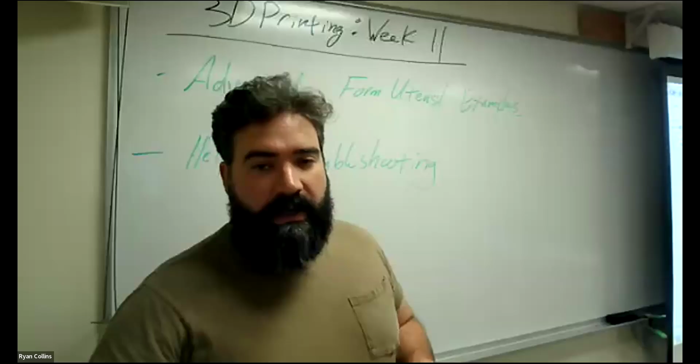All right, so like I said, we did our basic form utensils, make it a spoon, and ours kind of turned slightly nightmarish the last time, but that's all right. So tonight we're going to do some more example modeling of utensils, kitchen utensils. Again, this assignment really is super loose for what you're trying to make.

Whatever you want to assume is a kitchen utensil, spoon, spork, battle axe, sword, master sword. I don't know, whatever. I don't know, Halo sword. Cool. There you go. That's what you use for chopping onions. Yeah, full covenant snacks. Anyway, whatever you want to do, more power to you.

Basically, we are just making some sort of semblance of a utensil using the form workspace. Now, again, you are not required to make it only in the form workspace, but the form workspace is where you will be making the bulk of your utensils, with outside of the form workspace as details, like last time we used a sketch and extrude to cut holes in a spoon to make a strainer, that sort of thing.

I'm not saying, oh, I want to make like a kitchen knife, don't do just a basic sketch and extrude. I'm going to show you how to do that in the form workspace because that's what you need to be doing that in. That's the whole point of learning to work with the form workspace tools. So let's hop over and I'll show you what I'm talking about.

So we made our example spoons last class. Actually, the ones we made last class were far more unsettling, but that's all right. Just shifting over to auto color mode, just so you can see the difference. Again, your objects do need to be on their own components. So with this one tonight, some prior examples I made, albeit a somewhat scimitar-like kitchen knife, but yeah, sure, whatever. And I also made an example of just a kind of basic spatula.

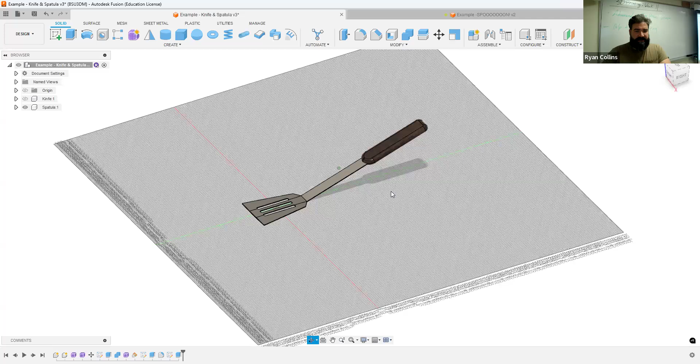Now this seems like, okay, I could have just made it as a sketch extrude, kind of sort of, but not because of how it's made. So I actually did this in the form workspace, and I'm going to show you how to do some basic stuff like this. So, as always, let's start a new project and save. Definitely save. Example in class, more utensils. All right.

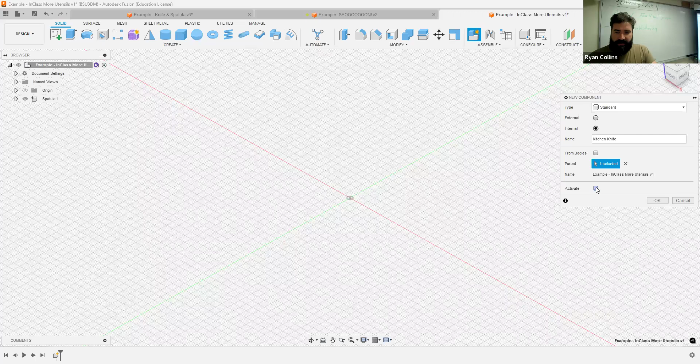So, a good thing to do is if you are going to be making some very different ones, go ahead and make your different components now. So, I'll go ahead and say one will be a spatula, and I shouldn't have left it on activate. And the other one, some sort of kitchen knife, and uncheck the activate box just so it doesn't already activate. All right, cool. So we got those all set.

Whichever one you want to start with, doesn't matter. So let's start with the spatula. It's a little more simple, kind of, sort of, go from there. So starting with the spatula, again, we are not starting with sketch and extrude. We are starting with the form environment. The little pink starburst guy here, the form workspace, brings out the other tools.

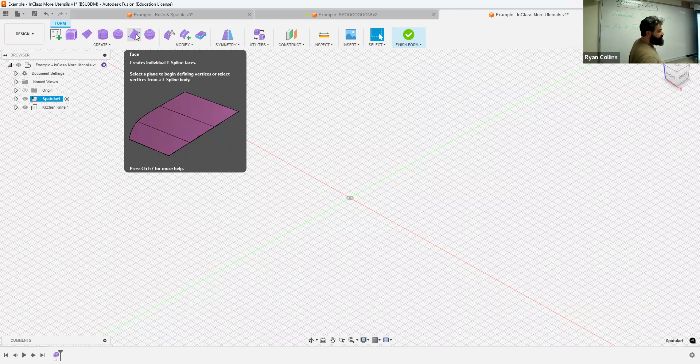Now we're going to work with this essentially the same way we did before with the spoon, just with a couple of different approaches. Now, what we did before is started with a plane. You could do that, certainly. You can also, if you want to play with free form stuff, work with a face, where the face is just the individual squares. We talked about before, any of this stuff is going to be chopped up into sections.

So a plane or a cube or anything like that, you're going to have your edges, which are the actual lines. You're going to have your vertices, which is anywhere there is an intersection. And then the face is the whole thing, anything between the lines and vertices.

Doesn't matter if you subdivide any of that kind of stuff or it's broken up anymore. Doesn't even have to be even. You can subdivide it in different ways. You can even go full on and chop everything into smaller and smaller bits. You're still going to have those whole things as faces, intersections as vertices.

You get the idea. Now, with any of this stuff, you can play with it, but remember the best way to start simple and add complexity later.

If you want, you can play with starting with a face. Standard procedure, you start by selecting a plane, and from there you're building little boxes. With this, it's a little bit more difficult to work because you're really more free form making this stuff. So I don't recommend working this way to start because it's easy to get lost. I'd start with prefabricated or pre-made forms.

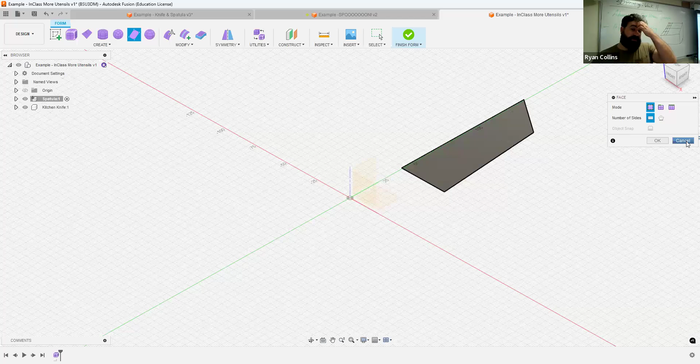Let's get rid of that. Start instead with a plane. So this is more like sketching. To begin, I'm going to start my plane toolbox has it selected as a center point rectangle rather than a 2-point. That'll help me keep things symmetrical. You don't have to start on the center point, but I do recommend working on a major axis.

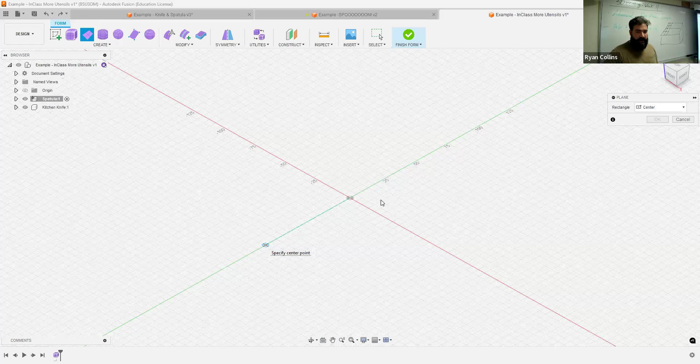So let's start by just creating what will end up being, probably, we'll make the spatula and then the other parts. Remember, don't hit enter. Use your left click, just start the selection. I want to hit it there because then you get to make your subdivisions here. You also get to apply symmetry.

So with this, I want to add symmetry, mirror. Let's go lengthwise. That's going to go right across the y-axis. You can see it's highlighted green. Great, that's what I want. Faces you can add and subtract, add more, add less. I would leave this, at least this one, left and right, simple symmetry, 2 faces. There we go. You can add more later if you want. Depends, totally up to you.

Now with this one, depends on where you want to go with this. I would recommend if you just kind of went freeform, play around. But it is a good idea to start with a reference image just so you don't go completely off the rails. But honestly, it's your project. Do whatever you want to do.

With this one, unlike before, I am going to add a little bit of symmetry to this. The problem is, see how that changed things. Because I now have symmetry, I'm trying to apply symmetry across 3 faces. So in this case, I probably need to go ahead and add more to 4, so I have left and right. I'll show you why I'm doing this in a moment. Hit OK. There we go. I have my symmetry applied. It's not centered, that's all right.

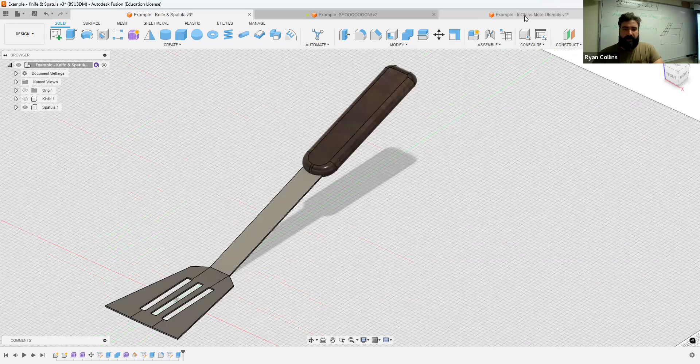Because what I want to do now, I'm going to go to the top view, and I'm going to make this into the blade, and then I'm going to create the handle. So what I've done here, just made a flat section here. I probably could have gone with even fewer parts. Wouldn't have been a bad idea.

I'm going to use my edit form. I'm going to select edges, and I'm just going to grab those 2 edges. And instead of dragging straight up, because that's going to morph everything, what I'm going to do is extrude those. By pressing and holding Alt, you can see I can start to stretch stuff. It's a pretty handy tool, and I'm using just the directional arrow. I'm not using the pan because otherwise that's going to do some weird stuff.

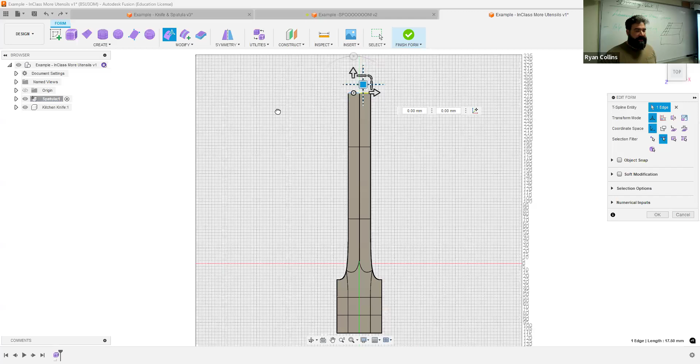Don't want that. Now, one quick thing. Do you see what happened though? This is split. How the heck did this happen? That's one of the issues with extruding just by faces and such.

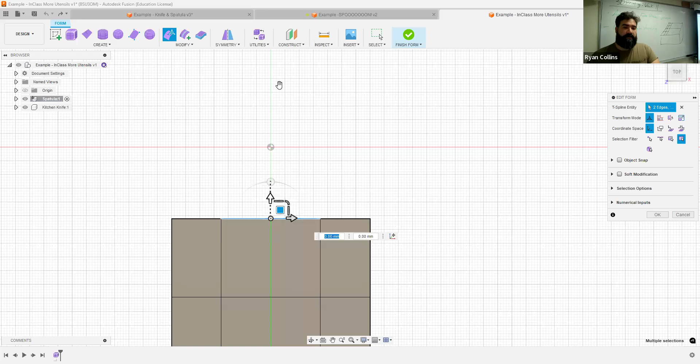You have to make sure that you also grab the center point. So what I mean by that is, let me Control Z, shrink that back down from before, and I'm going to change my selection filter to all. I have to make sure that I grab edges and that point. So it's going to show here, I've selected 2 edges and a point, because now when I press and hold Alt, that is not splitting around on me. So good, that's what I need.

All right, so I'm going to just go ahead and, again, stretch it. Each time you stop, release Alt, press it again to continue if you want to extrude. Otherwise, like from there, if I release both hands and then click again, I'm only moving the edge, I'm not adding an extra edge. Doesn't really matter in this case, it's totally up to you. But I am going to need that bend to change a little bit, so we'll figure it out in a minute. All right, up and up and up. Sure, that looks somewhat handy. Totally up to you.

From here, what I want to do is angle those edges to make it more like a spatula, how they're usually shaped. Obviously this is yours, so make it however you want. But if I want to make those edges a little different, I'm going to select all 3 sides there.

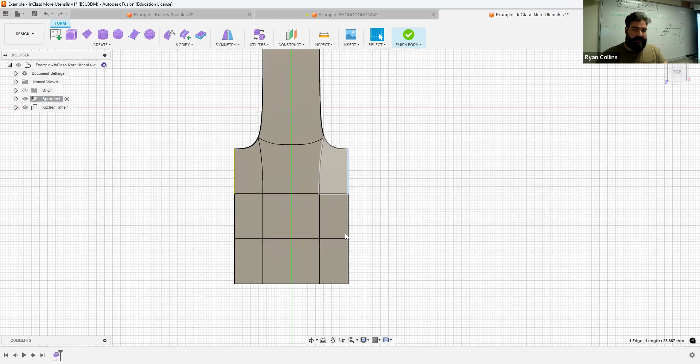I double-clicked on one edge to select it, and it's just the one that's blue. Double-click on just the edge and it selects all the things. But I accidentally got out of edit form, so let me go back to that and double-click.

Now I'm going to use the rotate tool because it's mirrored - see how they rotate in and out like that. Really simple, pretty handy. You can obviously make this into a pizza peel or whatever.

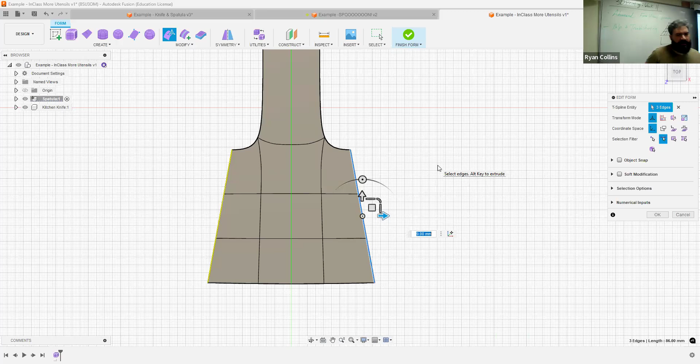So I have the initial object that I created, but it's grayed out, so when I hit edit I can't select it. You can kind of see it there. I don't know, give me a minute, let me check with that. Not sure what's happening with that one, but all right.

So right there, we've got a kind of sort of spatula form. Great, but it's flat - how do I actually bend this?

We're going to do exactly that. Same deal, edit form. I'm going to turn to the right side and I need to select the whole thing, so let's select all, and use a selection box from the right so it selects all the things.

Now the problem is if I try to rotate this, it's going to do some weird stuff, but that's all right, we'll fix it in a minute. So if I do that, I can bring it back up to straight, but it's all going to keep this curve.

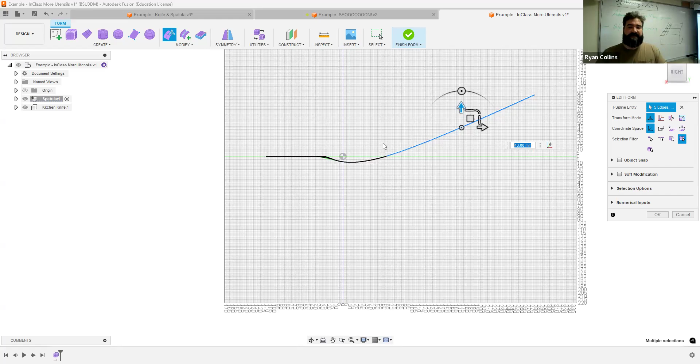This is all T-spline curvature - basically planar geometry created with fit point splines, what we used with our first bits of drawing. It curves based on lines and such, so this is going to mess us up if we don't change where some of the lines are.

So what I'm going to do, Control Z - what I want first is to move where this edge is. I just double click that edge and want this to be closer down here. Now I could try to just move this, but that's doing some weird stuff.

So the other option is I can select by faces and use the scale tool. Let's try to shrink that and then move it. Big thing is you could easily get into trouble with this stuff if you don't make use of some of the other scale tools, or you get really lost. It's really easy to do.

Another thing I can do is try to straighten this edge here because it curved like it did. Let's see what we have in our toolbox. Oh, I didn't want to cancel that - I wanted to. That's all right.

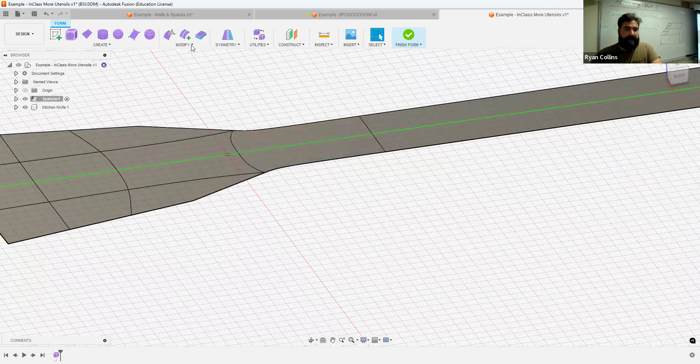One of the things we can do, let's try Crease. I'm going to select Crease, and what that does is take a curved thing and make it a folded edge. We talked about pieces of paper before - we've got a bend versus an actual sharp crease. Let's see what that one does.

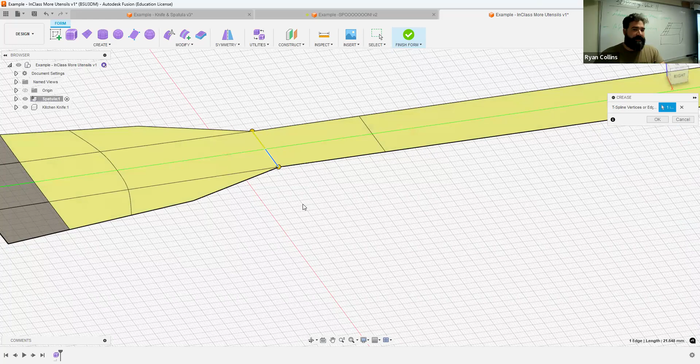I'm going to select that line, and it straightened it - that's exactly what I want to have happen, I want that to straighten. Great. Okay, so again I can try to edit this a little bit, but you know what, I'm not opposed to that spatula look. That works for me, all right, cool.

So now let's go back and bend this up a little bit. Select selection filter and edit form, all the things. Select from the right all the way up because I want this to bend right there. All right, that boots me out of that every time.

So I'm going to use rotate - however it's going to do all kinds of funky stuff. But what I can do from there, let me just bring this up until it's flat again. That line's flat, and so it can probably go up just a teeny tiny bit more.

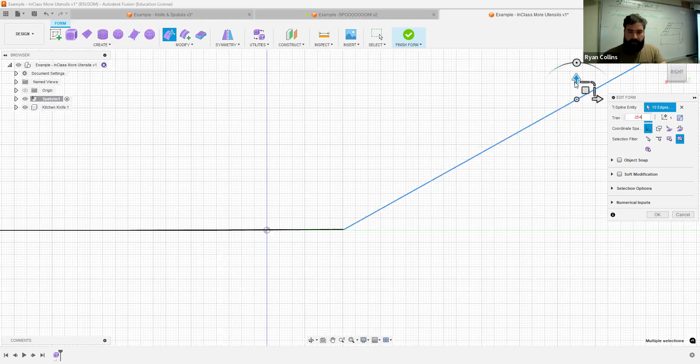Probably one is going to be too much, so in between, probably have to use like a 0.5. Maybe 0.25? Oops, and that looks pretty flat. With this project, close enough is definitely going to be close enough.

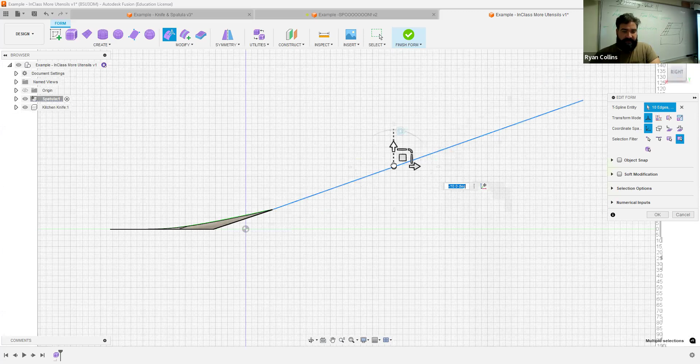All right, we'll go with that, works for me. That's probably a pretty extreme handle angle for a spatula - probably go a little bit less extreme, but you see where we're going with this. If you want to try and shallow it up, same deal. All right, there we go, that was a little bit better. All right, cool, that works for me. Hit OK.

All right, that's pretty much a really basic spatula part. But right now it is just that surface thickness, only currently the thickness of a sheet of paper that's been folded. I need to literally add dimension, add thickness to that.

So I'm going to use the thickness tool, thicken. It's right there, one of the other keys, under modify. Select thicken, select the face, and add, I don't know, 1 millimeter thickness. Now remember you have a couple of options here. We'll say 1 or 2 for now, and you can see what's going to happen.

You have a couple of options with your toolbox: thicken type, sharp, soft, and no edge. If I did sharp, obviously it's going to make it like a straight extrude, like that. Repeat thicken. If I do soft, it's going to make it squishy and round. Not quite what I want for this tool.

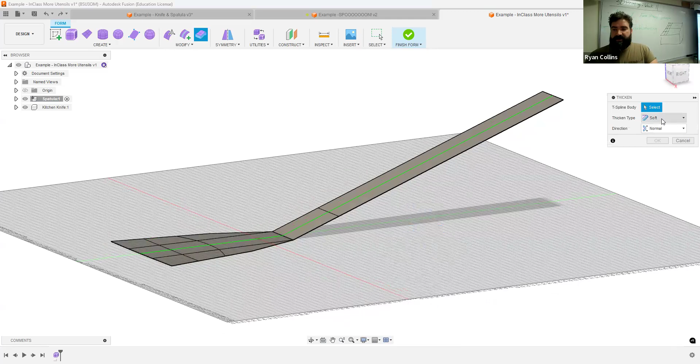The other option is no edge. Now this is if you basically want to offset, so that's exactly what I've done with this. This is using the offset tool. I don't want to use this right now, but I just wanted to show you what that tool can do.

Let me go back. The thicken I do want to use is sharp. That, I don't know, let's say 2 millimeters. That's probably a bit thick, but whatever. Hit okay. All right, it's a nice sharp edge. I've got my kind of sort of spatula look, and it's all bent at a decent enough angle.

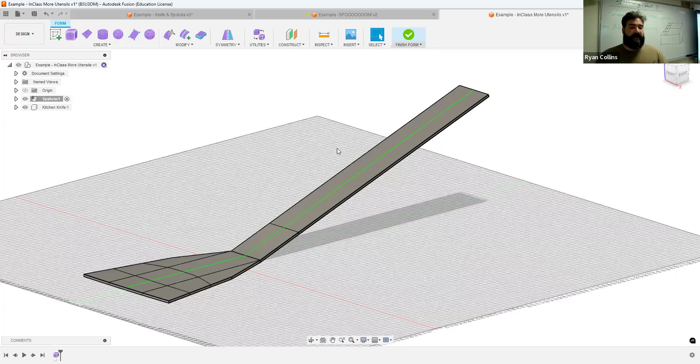All right, cool, let's save. Well, actually, hang on—when you're finished with this, this is all I need for this tool. But really simple, it's all sharp edge, nice sharp bend. I use the crease tool to make a sharper bend. Great, finish form. All right, goes back. It is a solid body because it's enclosed, all that. Let's save.

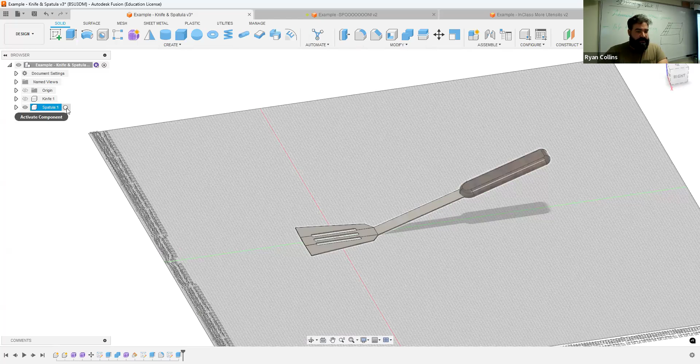All right, now I want to make a second tool, and with this you can do this either as one object, or I can go back in and actually create a second one either way. What I mean by that is I exited the form workspace. I could start an entirely new one because I want to make the handle here, or I could go back and right click, edit form. In this case, just for the sake of a little convenience, I'm going to create form.

There we go. Now selection of box is going to be a little problematic because I don't have any options here. Now the thing is, though, I want to use like, let's say, a box or something like that to create the handle. Well, the problem is that handle is modeled at an angle.

Now technically I could do a couple of different things. Like I could always just make it separate and try to get it to even out. But just like we did with the Jewel project, you can create construction planes based off of things. So let's go to construction plane, and let's see here, which is...

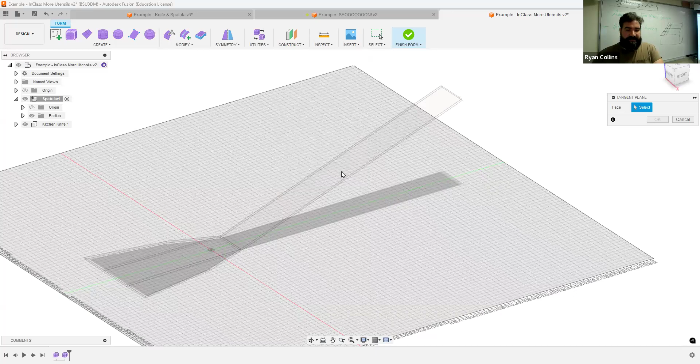Plane along path—sorry, I had a brain fart, I forgot which one it was. There's so many options here. Let's do tangent plane. Now the problem is, because of the way these things work, sometimes it won't let you select stuff. It does some weird things because form doesn't read—even though it's a solid object, it doesn't read the same as a solid body if I had created this through our standard sketch and extrude stuff.

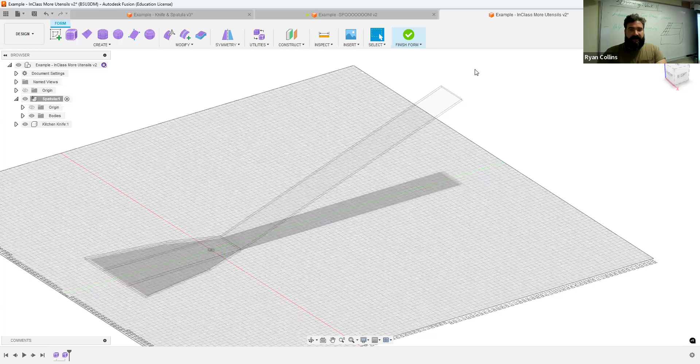So it doesn't let me select a lot of stuff. So what I'm going to do is cancel, finish form, and you can either just delete that one, or I'm just going to move the time slider between there, because what I want to do is try constructing a plane.

Offset plane—no, not offset plane, sorry. I want to put... dang it, I keep hitting the wrong button. Tangent plane—no, I don't want a tangent because that's not a circle. Let's do plane at... probably just plane at angle.

Yeah, so what you can do is, since this does read straight, I can select one of these edges. Now the problem is it's wanting me to create an angle that way, but let's rotate it 90 degrees. There—so now my construction plane is actually at the same angle as the handle. So that was plane at angle. That one worked pretty well. Hit OK. All right.

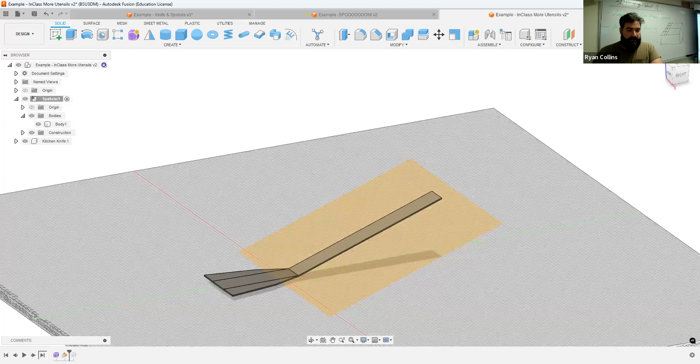So let's just say I had deleted that edit form, create form, and I want to use now that plane that I just created as the reference, not my standard X, Y, X, Z, all that stuff. I can use my actual plane that I just created. There we go. All right. So it's going to make this right there. So you got some options, standard thing again. We could try, let's just use the same plane there.

All right. So I'm going to use Z-axis, smack in the middle, and let's just make this a little bit bigger. There we go. Hit OK. It's just a plane. That's all. Length symmetry. Nope. I want width symmetry so that it is actually, where is my, oh, no. There we go. So same deal. I got symmetry side to side. Away we go. Okay, cool.

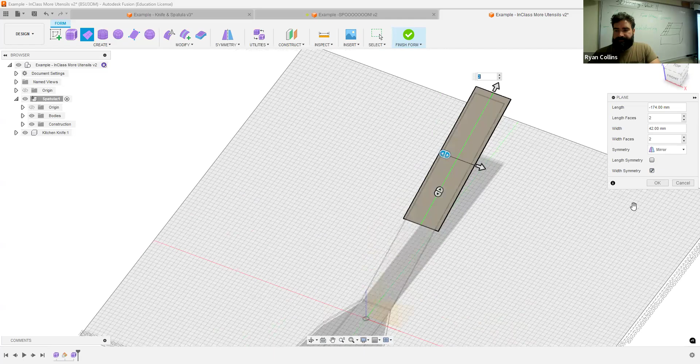So same deal. You can play around with this. You can stretch this around as you want. We can make curves on this. We can do our edit form, all of that. Let's see. I don't know. Let's move that out a little bit. We can make this kind of like just a weird handle.

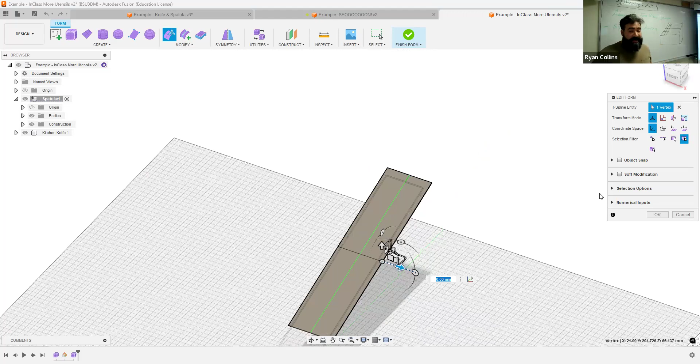But if you wanted to add complexity to this, I said, okay, let's try adding some edges. So I'm gonna select that, and I'm gonna do double. Oops, not simple. I want both, so it goes on both sides. Adding edges simply subdivides the surface a little bit, like so. Okay, that just added a little bit of complexity.

The reason I would want to do this is because now I could select like by vertex, and I could move these in and out a little more directly. So it just adds, if there's more points, now I can add more variation. That's all. So let's just say I just made like an extra wide handle. There we go. Cool. All right. Same deal. I want to thicken this.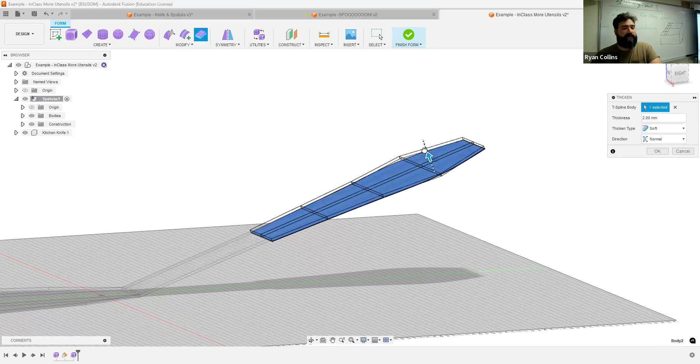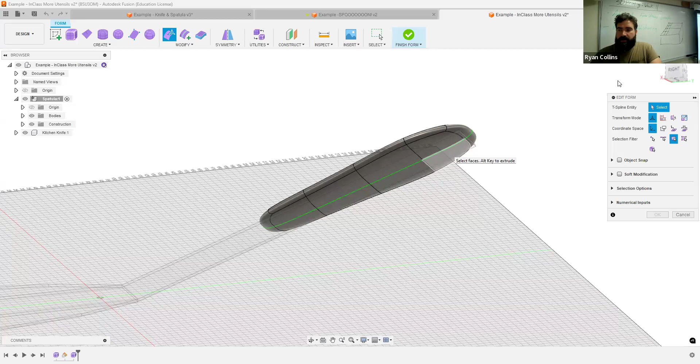Same. This time I'm going to use, we'll use soft. And if the handle was 2 millimeters, I don't know, let's say 10. Cool. There we go. Now, the problem is it's floating above my form, but easy fix there. Back to edit form. Select my face, and let's just select all the faces. So all I'm going to do is just drag that down, make it a little bit thicker. There we go. Hit OK.

Cool. All right. So remember, you can play around with this however you like, but now finish form, and we have kind of a blobby handle. Last thing on this would be adding details. So what I did for the details in this, cutting holes for the spatula, and what I didn't do on this one, but I did do on the knife, let's add some little pins to it. So that would be where the handle actually attaches. All right. I save handle. Oops, apparently I had that on.

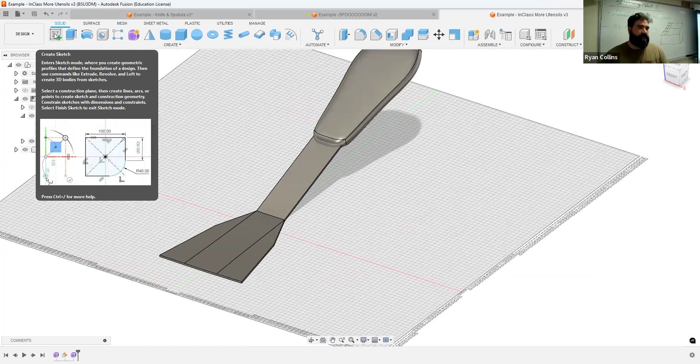All right. Easy thing, sketch and extrude for the base. We're outside of the form workspace. We're back to our regular stuff. Sketch and extrude. There we go. If you need, use a project tool to copy the outside edge. Press P, and we'll select my body. There you go. Just because sometimes it's a little bit easier to deal with just an outline than actually having the body there. I'm going to use a center point rectangle right on the axis.

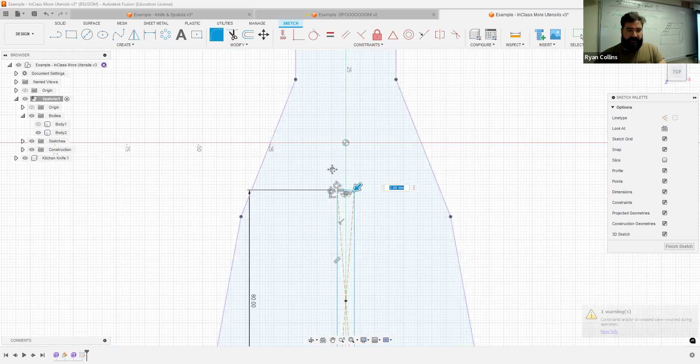I don't know. Make that, sure, 6 sounds reasonable. I don't know, 80? Sure. And let's put a little curvature into that. Fillet would be sidey side. Select all the things. Yeah, error. I know I'm changing things up. That's okay. Select, select, select, select. All right, great. Yeah, that's kind of sort of roundy. Works for me. Okay. Yes, I know. Change the constraints. It's okay.

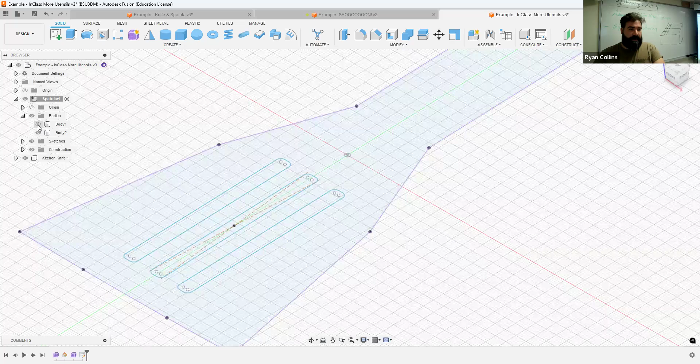And instead of making copies of that, just use the rectangular pattern tool. Double click the rectangle there. I want this to go in symmetrical directions, and let's have some extras. Yep, there we go. Made that. Finish sketch. Great. Unhide the spatula handle or blade. Label your objects. It makes things so much easier. And I'm just going to use Extrude to cut through this. So select my sketches.

And actually, since it's on the bottom plane, on the base plane, if I select to object, I can just select the top there and it should chop through. And if it's not, just use the slider to drag your object all the way through. The red goes to cut. Hit OK. There we go.

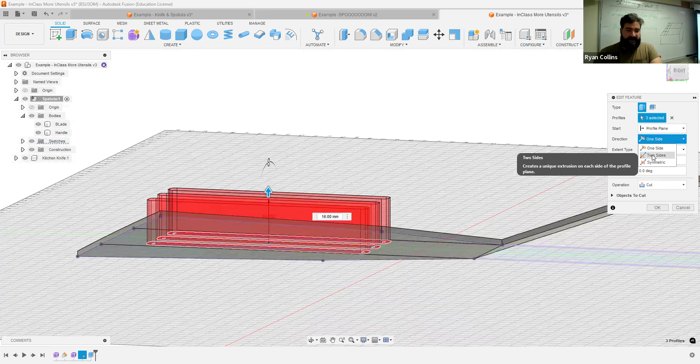Now see what happened? It wasn't all the way down. Should have made it go both directions. Go back, edit feature. Not a problem. With your direction option, go 2 sides or symmetric. It doesn't really matter. We'll just do symmetric. Way bigger than it needs to be, but that's all right because it does in fact go all the way through.

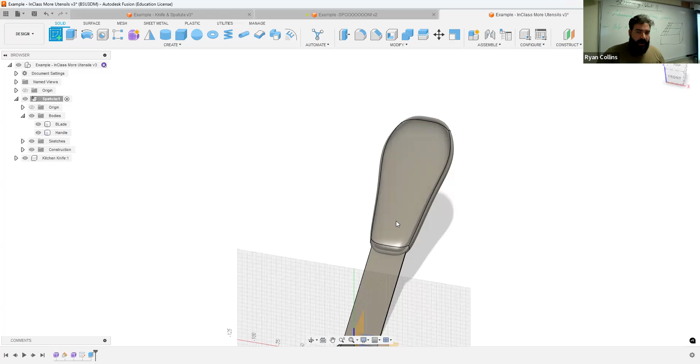No big. That's it for that one. Now for the handle, of course, we can add little details. Remember that you can sketch on surfaces, but you cannot sketch on forms. Even though we've converted it back to a solid, see, it doesn't like to select there. That's why we use the construction plane. So it hid that construction plane, just bring that back up. No problem. That's exactly the same thing.

Cool. There we go. So what I'm going to do is I'm just going to make a couple of circles that'll end up as cylinders, right on the axis. Make a pretend. Sure. Another one. There. Great. That's it. Finished sketch. Now I just extrude those two. No, I want both of them. Not letting me grab it. There we go.

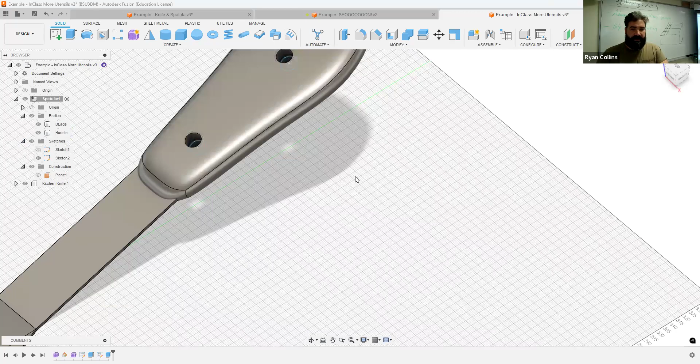So from there, if I extrude it symmetric both ways, that's going to cut through. Cool. I made my little chop, but I also want those to be solid objects. So one last extrude, circle, circle. And let's just extrude this symmetric. Let's see if it all works. Yeah, see, it's done. Like I said, form objects work differently. Fusion doesn't like to read them like we've done with basic sketch extrudes. It kind of messes with it. So you have to do a lot of this stuff manually.

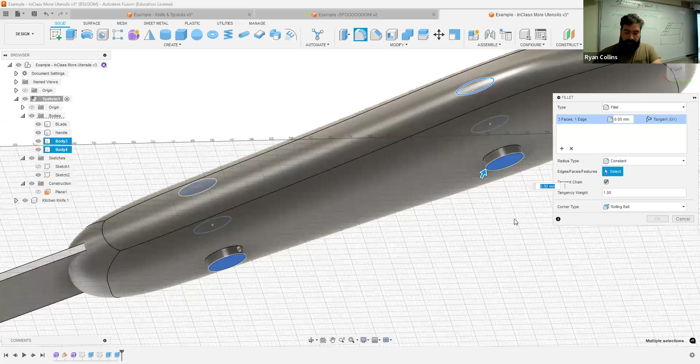So I'm just extruding this so it just sticks out a little bit. That's probably a little bit too much, but you get the idea. Yeah, that's fine. Nope, I don't want to join. I'm just going to leave this as two new bodies. And we'll fillet those just to make them slightly smoother. Always throw in the details. 1 millimeter curve? Sure. Cool. All right, there you go.

Last step with that would just be adding appearances. Press A, appearance. Let's see what we got. Sure, we'll make something super fancy. Ooh, bamboo, rich mahogany, walnut. Walnut's always pretty. Drag and drop onto the object. Walnut handle. And where's our metals? We'll do some brass pins. Ooh, polished brass. Make sure you download it if it hasn't finished.

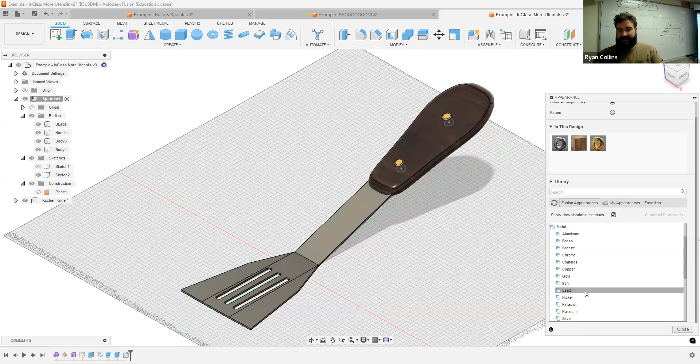Fancy. And we'll go with incredibly toxic lead. Ooh, there we go. Polished iron. Let's see what that looks like. No change whatsoever because we're not in the full rendering environment. But there you go.

All right. So a few extra steps. Kind of got a little wonky, but one of the main things to remember is, even though it's selecting now, you can't sketch on faces that are from the form environment. So you have to create planes that share that. No different than what we've been working on. You just have to make a plane. All right. Let's save that. Spatula done. So wonky, but again, this doesn't have to be exact. Close enough is close enough.

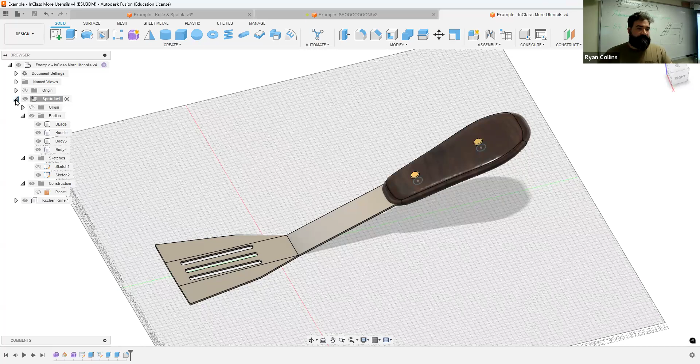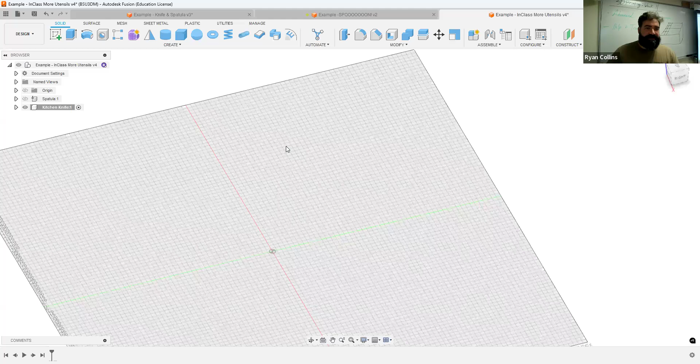The other one I wanted to model was some sort of kitchen knife. So let's do just that. Again, if you want to bring in an image, great. Try to at least make it a reasonable size, just because I don't know if you wanted to print this. Obviously, if you make a broadsword, you're definitely not gonna be able to print this on the printers, but we could make a tiny little letter opener version. Anyway, let's make something with this.

Create form, back to where we were. So I'm gonna use this as the plane, and I'm gonna make it left to right. Same deal. Start on one of the major axes, make it as big as you like. Doesn't matter because we're going to stretch and manipulate this anyway. Tell you what, we'll make something more like a cleaver. Now with this, I do not want to add symmetry because I'm making the blade like I'm looking down at a knife sitting on the table. I'm going to make a profile and then use the thicken tools to add dimension to it.

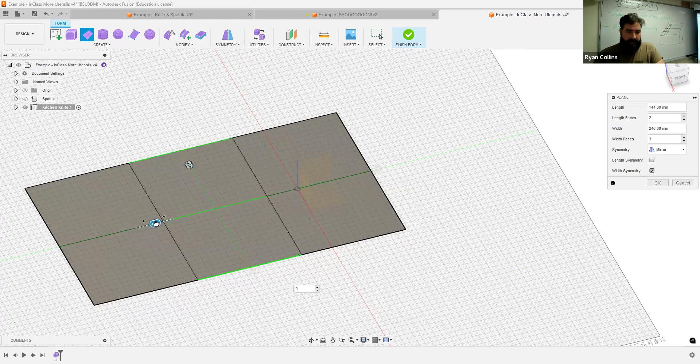So let's start it simple there, but let's add a little bit of detail the other way. Let's try to leave it a little more simple. We'll add a couple of details that way. Great. Hit OK, no mirror. First thing on this one, I want to add a little bit for what will be the handle. So I'm just grabbing the edge right there, and you can drag it out, but oops, I accidentally still had symmetry on. So perfect example here.

Let me cancel that. If you accidentally left symmetry on, all you have to do is go to symmetry, clear symmetry, select the thing. You're all set. Free and clear. Great. Back to edit form. Let's grab just that edge and drag it outward.

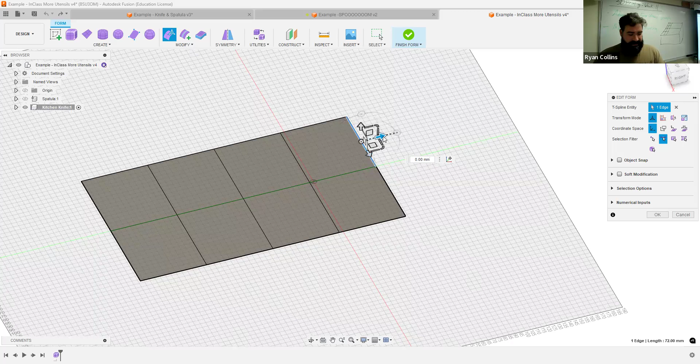Now, again, the problem is it's going to drag it that way because it's all connected. So, Control Z, let's Alt and extrude. There we go. Much more of what I wanted. Still a pretty beefy handle, but that's all right.

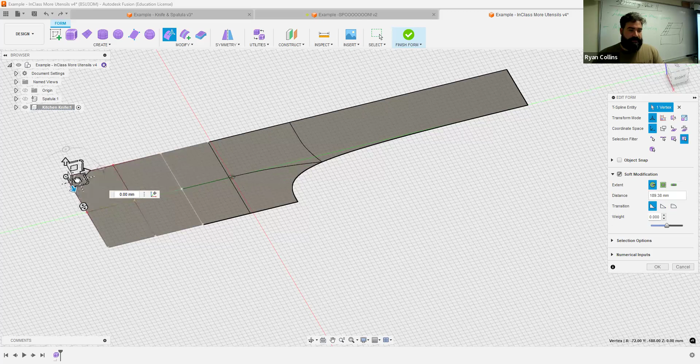Okay, select from there. From here, you're just going to kind of play. I think I'll select a point, start dragging that up. Probably should have used the soft modification controls. Let's turn that on and see what that does now. Drag that up. That pulls things a little bit more easily. Good. All right. Kind of sort of cleaver.

Sure. Let's drag by edges. I'm going to select all of those and I'm going to drag it down. This is going to be a mildly horrifying thing. All right. Can drag this out a little bit more. Sure. Whatever. Now, if I can try to straighten this out a bit again.

So let's hit OK. And let's try straighten. This is for exactly what it says. If you end up with accidentally little wobbly faces or edges, you can try to straighten them out. Let's select some edges. T-spline vertices between that one and that one. That one? Ooh, that's getting funky. Don't know that I like that.

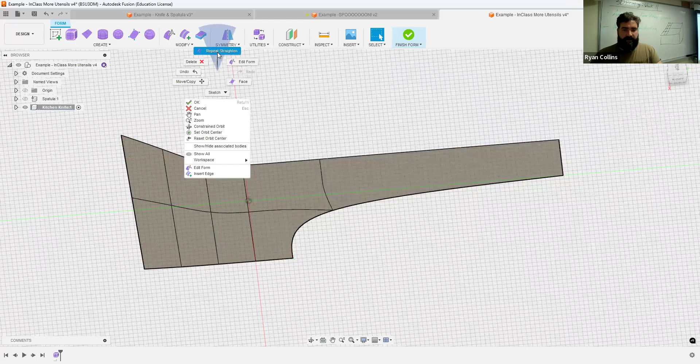I'll try it once more just to see what it looks like. Just to try a couple of things here. Like I said, a lot of this, just play. See what happens. Yeah, that's not the worst. I know that's basically what I just did before. Whatever. You get the idea. Now, try once more. Just want to show you what happens if I move some stuff around. Cool. All right. Good enough.

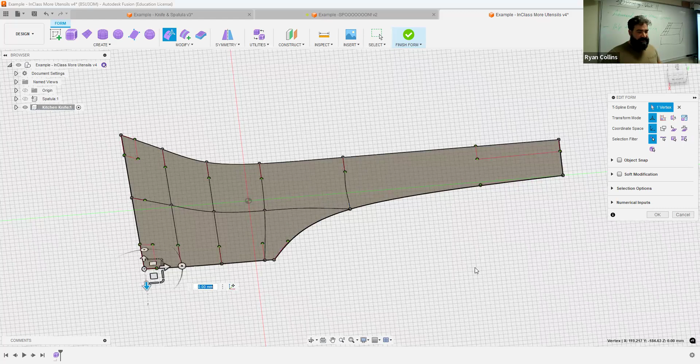Now, what happens if I wanted to, like, make this actually rounded and such? Can I select details, move vertices? Yes. But you can also, remember, grab faces. You can use the scale tool to move stuff in and out. So if you want to shrink the space between them, that's how that works. Even more so. Not quite. Do some weird stuff.

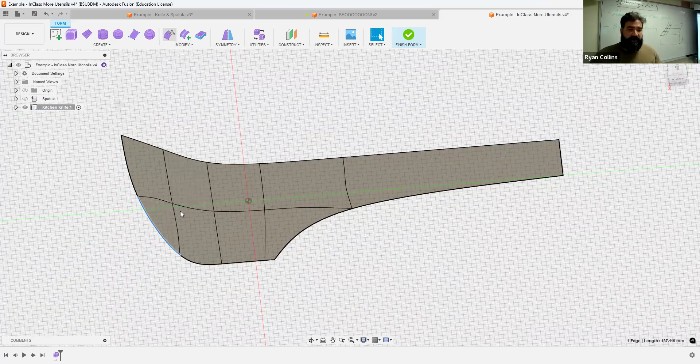Okay, one last thing I wanted to show you on this is what if I wanted to actually add a rounded feature to this? Easy way to do this would be select just a vertex and literally hit delete on your keyboard. Warn you, it does some funky stuff. In this case, just round it out. So this is going to be treated as kind of a corner, but there's no point there. So you can try some different stuff. If you want, you could then try something like scaling that up to try to modify the curvature.

So again, so much of this is absolutely just playing with, just see what happens. We're not trying to make something really overly functional, just something that kind of sort of looks the part. Okay, that's good enough for now. Hit okay. Now we want to add thickness. However, I want to add thickness and still make it a sharper object. So I'm going to go to thicken, or rather, hang on a second. Before I do that, save. Cleaver blade.

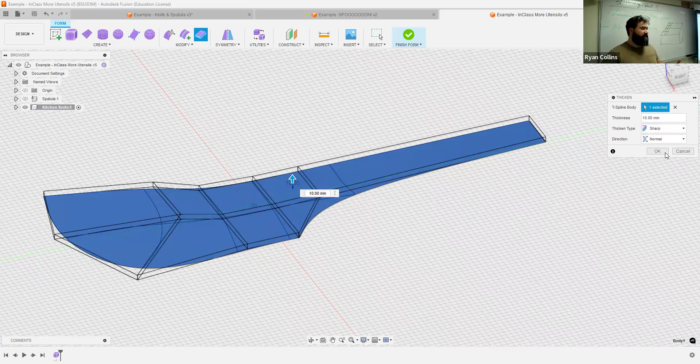Go to thicken tool. In this case, I'm going to use sharp. Now it's going to make it more square. And yeah, 10 millimeters is going to be pretty beefy, but just for the sake of this. Now, the reason I've done this is because it's given me a nice sharp edge everywhere else. However, I want these two edges, top and bottom, to come together.

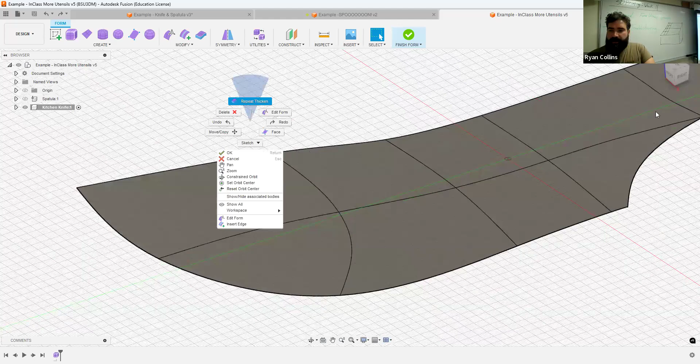Now, what I could have done is repeat thicken, done it with no edge, and brought these together using a different tool, which I'm going to show you in a second. But I've run into problems then closing up the backside. So I have found the best method for doing knives and such: thicken using the sharp thicken type. And then we're going to go around and delete some faces. I'm going to select in here, just all the way around, where I'm going to make a blade edge.

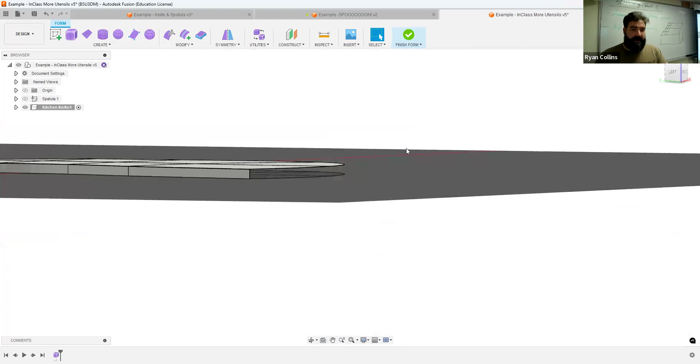And we'll see about the backside. Delete. So now I have a partially open surface. You can see the back is solid, but there's space in between. And what I'm going to do is I'm going to modify, excuse me, and where are you?

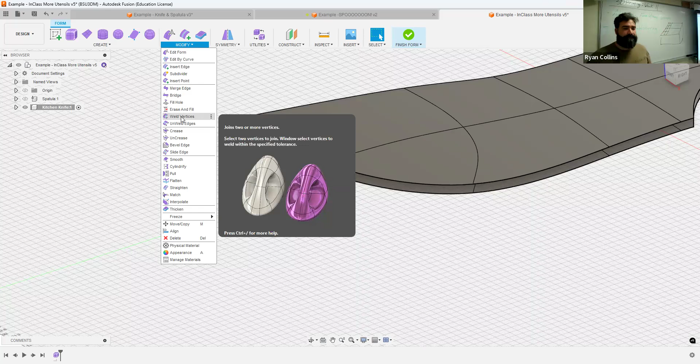Weld vertices. So what this does is it takes two vertices that are apart from one another, snaps them together, and joins them as one. So select weld vertices. You have your different options. Vertex to vertex, meaning just like a lot of the tools we've used before, the first one you select is what will move. The second one you select is where it will move to. That's using vertex to vertex.

Vertex to midpoint, obviously they just meet in the middle. That's the one we want. And then keep creases. Show you what that means in a moment. So let's start. 1, 2, brings them together. 1, 2, 1, 2. This can do some weird stuff. So let's check the keep creases box.

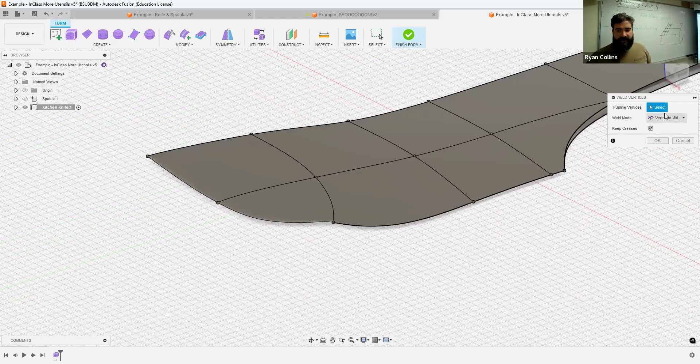Getting funky. Yeah, this part gets a little weird right there. There we go. Now that happened because I selected the keep creases midway through. Let me just cancel it and redo it. This time we'll select keep creases right from the get-go. 1 to 1, 1 to 1, so on and so forth. There we go. So that holds a little bit easier.

So that lets all that work. Now I will warn you. Let me hit OK here. You can see it. Let me change the color mode and see it a little bit more clearly. Sometimes this will create a divot here. And what you might have to do to fix that is sometimes you have to delete faces and then just go through and then go to fill hole.

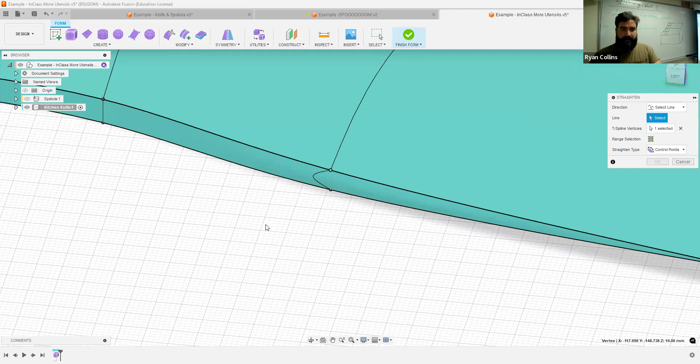In this case, though, I'm going to try something else. Straighten just those two. I ain't doing squat. Cool. Whatever. We'll try select line. Nope, didn't do squat. All right. So let's try it this way. In case it did, in fact, give us an error, I'm just going to delete those and see how that changed right there. Now we're going to go to just fill hole.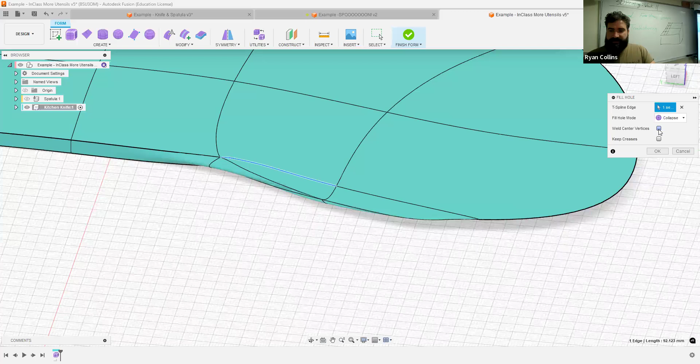What you do to use fill hole is you just select the perimeter edges. Sometimes you can select individually. Ooh, that did some weird stuff. You have your different options. Let's try collapse. Oof. Keep creases. Yeah, that did some real funky stuff. Let's try double clicking. All right, so in this case, I've actually made everything so much worse, mainly because there wasn't actually a problem before.

So I'm just cycling through some of the options. Fill star was one of them. Let's try unchecking keep creases. That just turned it into like a paddle. All right. So honestly, it looks like it was okay before. So cool. Easy peasy on that one. That just means cancel and control Z. All right. Worked before. There wasn't a problem this time. I just wanted to show you if you ran into that, that's how it happened.

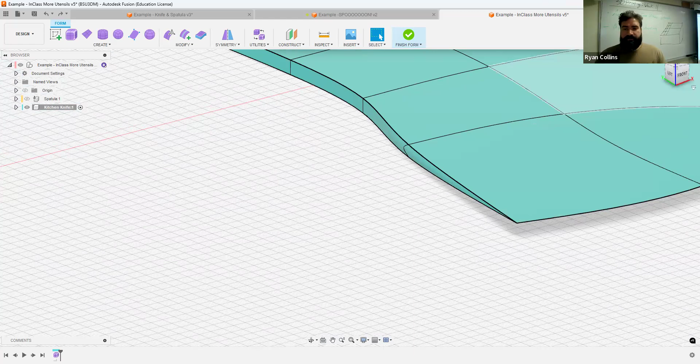All right, cool. So that's pretty much a sort of kind of blade edge. Let's hit OK, save. Blade edge. Snazzy. All right. So we can use the thicken tool here to create a handle, but in this case, I want to show you, actually, no, I do want to do that because I want to do some other forms. So before what we did is we created a completely separate form. You don't necessarily have to do that. You could just start a new one right here.

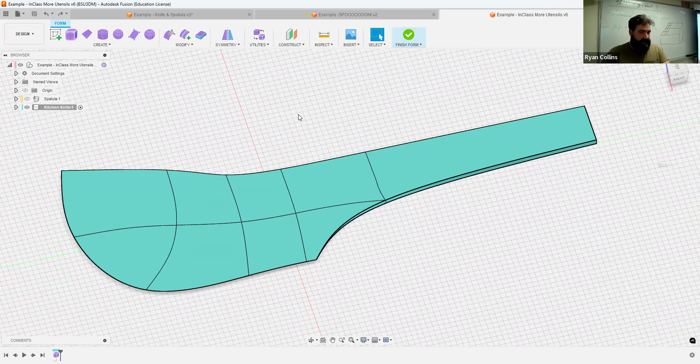So let's create with a box, sure. So, yep, on the same plane. Come on, it's giving me trouble selecting it because it's inside of that. All right. From the top, same deal. Just going to make something that's a little bit larger than I need. And I can, of course, modify it afterwards. Hit OK. Make this a little bit bigger.

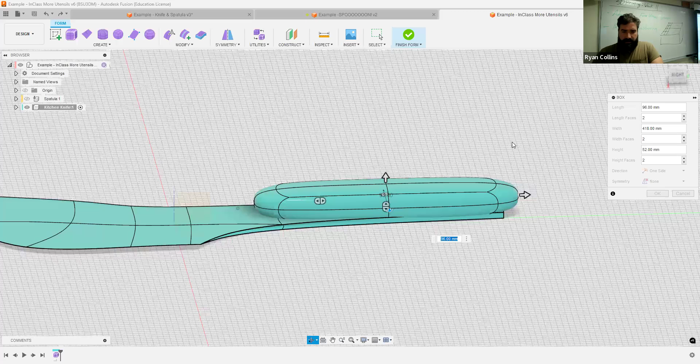Now, the problem is if you make it larger one way, it gets larger the other way. And I can always just kind of modify that afterwards. So I'm going to leave it right there. Symmetry. I don't want symmetry on this, at least that way. I want symmetry height-wise. There we go. Now, the problem is, see, it's all floating above the handle. We'll just move it into place afterwards. Okay, cool. That'll work.

And the reason I'm doing it this way is I want to add some subdivisions up here. So I kept it simple this way. Let's add some edges just there. Hit OK. And let's do it again.

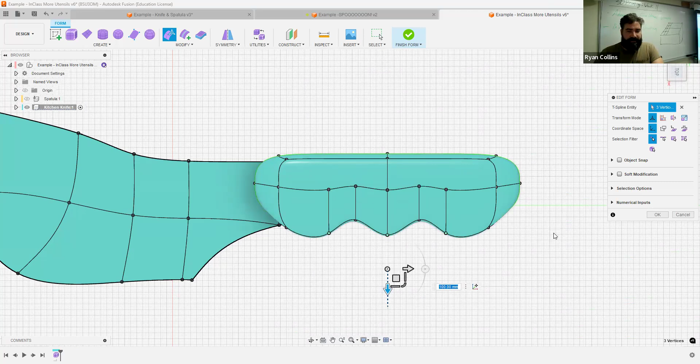Sure. Cool. All right. Now the reason for this is I can go to edit form by vertices, and I can just select some of these. I'm gonna skip them, one, and then skip to the other. And by dragging out, kind of sort of finger grooves. That's all. Obviously, you add a bunch more, you're gonna get a better result out of that, but I just wanted to show you a quick way where you could do something like that.

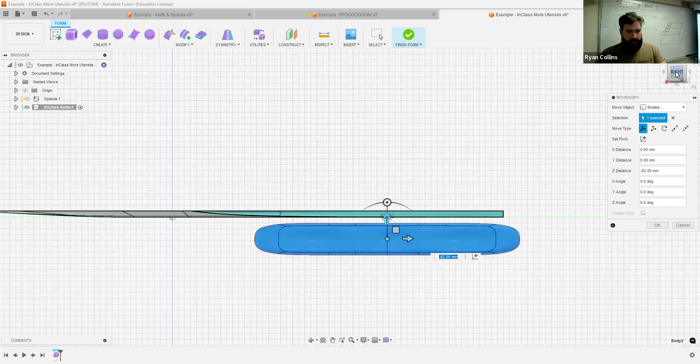That works. Hit OK. Now, while we're still in the form environment, might as well move this object, and I want to bring that down. Now, the easy thing to do is, because I have the mirror tool aligned, I'm going to line that up. Try to line it up right smack in the middle of my blade. If it's a little off, it's not going to be the end of the world. There's obviously much better ways to do this, but this is just a really basic way of working with some of these tools. And hit OK.

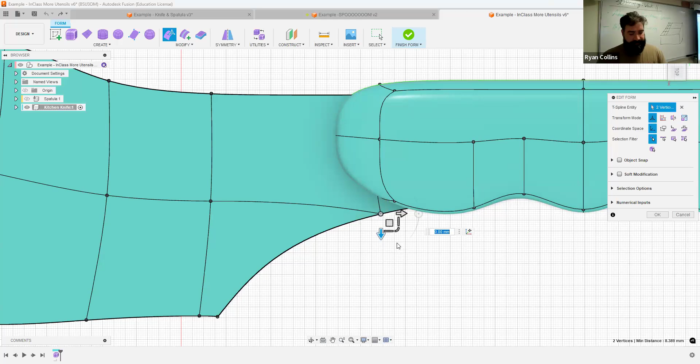All right. Now, granted, the handle is a little funky. I can always go through and fix that a little bit, or as best as I can. Let's try edit form, and I just want to select by there, just so I can try to bring the, oops, what happened? Oh, I didn't select both of those. When you're working above and below, something like that, sometimes it's easier. Instead of just individually selecting, use the actual selection box, so you're making sure to grab both the top and bottom or any vertices in a line. And yeah, I'm just going to drag that forward so it kind of sort of matches a little bit better. That's it. Okay, cool. That'll work for me.

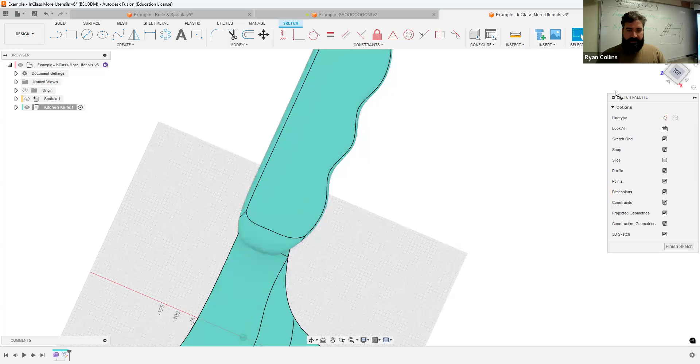Hit OK. And now we're going to do the same thing of the spatula. Want to add a couple little pins. So same deal. Sketch. Yep, onto there. I don't know why it rotated on me. And we're just going to select somewhere there-ish. Now let's make that a little bit bigger so you can actually see it. Cool. And this time, I'm just going to copy and paste and move the other one somewhere over. That seems about right. What I could have done the first time was copy and paste, and I forgot sometimes. All right, hit OK, and extrude those.

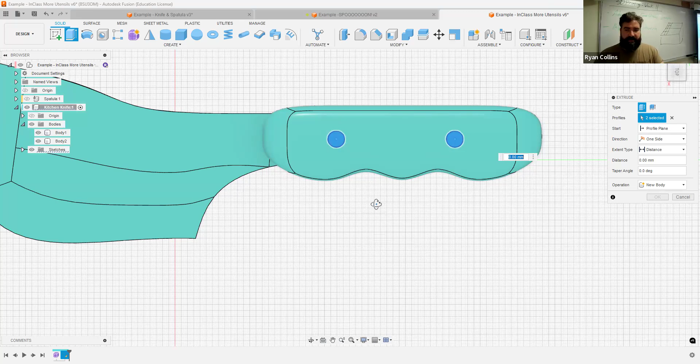Sketch, sketch. Again, I'm having trouble selecting the second one for whatever reason. If you run into that, just hide some stuff so you can select both of them. Now remember, Extrude works, Fusion works on what it can see. So if you have something hidden, it's not going to affect it. Make sure you have both your objects visible. Direction, symmetric, just go all the way. It cuts through. Cool. Now do that again to make your pins.

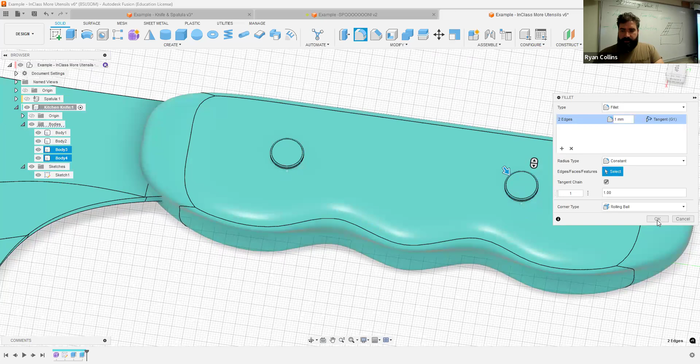Extrude, same selections. My extrude tool. There we go. And new body. Sticks out just a little bit. I want new body. Great. And again, I'm just going to add a quick little fillet to the tops. Oh, my pin went slightly below. Where the heck is it? Oh, I accidentally extruded only one direction instead of both. I'll fix that in a second. I don't know, 1 millimeter. Cool, there you go. All right, switch back to color mode.

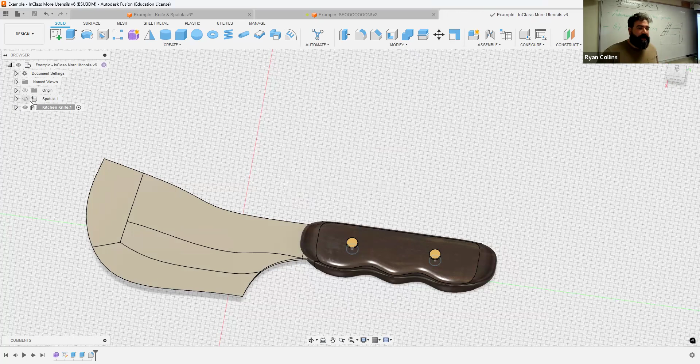Let's add some appearances. Same deal, why not? I'll make some of these match. Brass pins, rich walnut, and I don't know, something else. Heck yeah, platinum or palladium. Extra fancy. And it makes almost no difference because, again, you're in this working environment. All right, there we go. So, cleaver done. So there you go. Couple extra steps we needed to take to make the parts.

Wow, that is an enormous cleaver, or it's a tiny spatula. I'm not sure which. I did not measure these. So at worst, scale it, whatever. So again, try to make the details there. So like the handle, yeah, it's there. Realistically, I would actually join these together or something like that. But in this case, we're just working with the form tools. I just want you to experience them. I just want you to play around with them, see how it works, make whatever you please. Sure, incredibly gigantic, oversized cleaver, or comically small spatula for flipping quail omelets. I don't know. Anywho, make what you want.

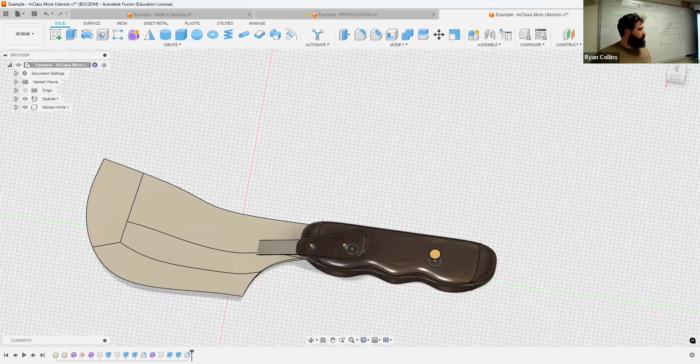Use the form environment, use the sketch tools to add details, cut throughs, anything like that. You can, of course, still add text and things like that to these, if I wanted to, I don't know, write words on it. I know that's what text is. Go for it. Whatever you want. But just remember that we are making 3 objects total. They do need to all 3 be on their own component. Make whatever is entertaining to you. All right. Good luck with it.